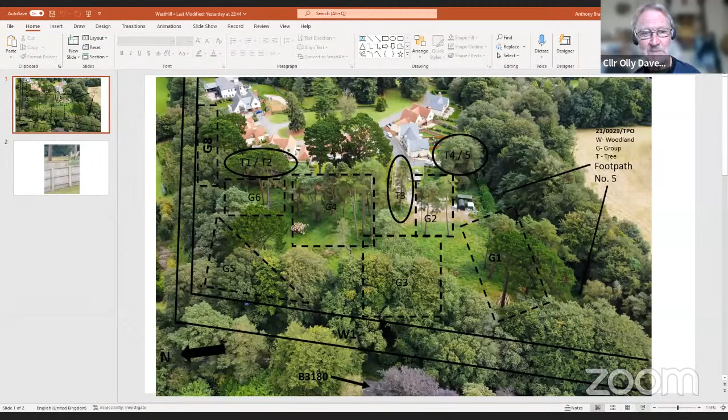Okay, and looks as though we've moved on to Mr. Bragg seamlessly. Okay, thanks, Chair and Committee. I'm negative to any development in the area described as W1 in West Hill, and I'm going to talk off the attached PowerPoint, which you've got in front of you. You can see the north orientation here, and here's the B3180 road running north-south next to it.

I have to say the icons relate to a TPO, which roughly approximates to W1. Basically last year, when the bulldozers moved in, without the early intervention of Councillors Jess Bailey, Della Cannings and the local residents, this area by now could have been denuded. The area not only offers a pleasant view from the B3180, but it's an effective noise barrier as well.

The adjoining footpath, number 5, is used regularly by local residents for their daily exercise. This area and its accompanying trees not only have a special relationship with the local landscape, but contribute to the character and appearance of West Hill. W1 is home to many species of wildlife. Hearing owls and sightings of buzzards and bats is common. Mr. Robin Offer, your tree officer, noted the presence of fallow deer when he visited on a site visit. So any development here is going to cut into this very pleasant amenity, which all of us enjoy.

I want to mention a couple of items not included on the site assessment. Number 1, there's an attenuation tank which sits astride the High Point Ordnance Survey contour line. We've had some flooding in neighbouring gardens recently, so any increased flood water could be a consequence of disturbing this attenuation tank.

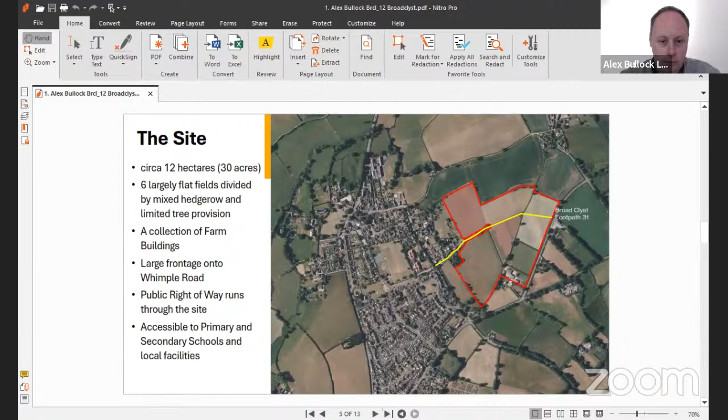As part of our early analysis, we look at the form of the settlement together with its facilities, as well as site constraints and opportunities. The site is subject to only limited constraints, including a small area of flood zone 2 adjacent to the New Inn, boundary hedgerows, and a small number of neighbours, including listed properties on the eastern boundary.

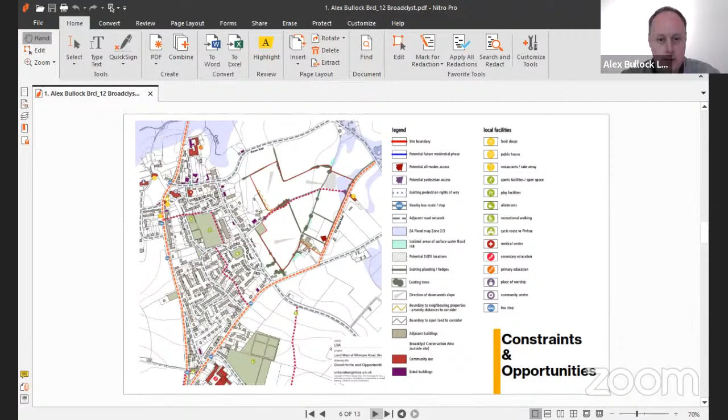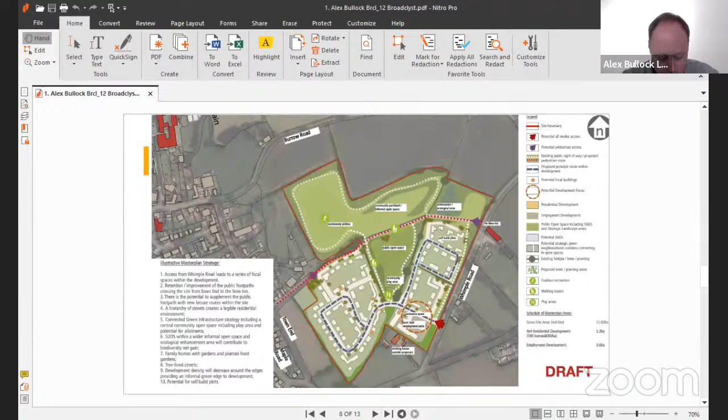This slide shows the illustrative master plan. This is our current thinking, which shows indicatively 160 dwellings, consistent with the draft wording, and a small area of employment land adjacent to the existing agricultural buildings in the bottom right-hand corner.

We propose an element of self-build plots adjacent to the New Inn, alongside the potential for community sports pitches, and significant areas of public open space, including community parkland.

We propose access will be taken from Whimple Road, and the existing public right-of-way will be retained along with the majority of existing hedgerows. As a result of this sensitive approach, together with the public open space provision, we expect to achieve a biodiversity net gain figure well in excess of national requirements.

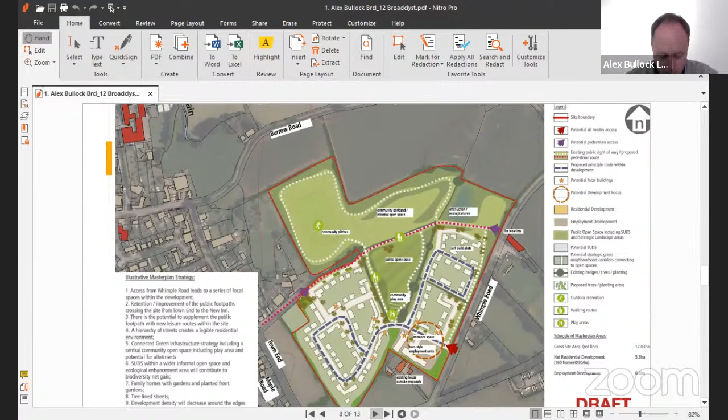We are continuing to develop our technical evidence base, which includes ecological surveys already underway with no significant issues identified. Alongside ecology work, we're looking in further detail at the access arrangements, and further technical work in respect of drainage, landscape, heritage and noise are also planned.

This site is ideally located relative to the range of key services and facilities. This includes 2 schools, both primary and secondary, a convenience store, and a GP surgery and pharmacy. All of these facilities are within acceptable walking distances, broadly a 5 to 10 minute walk.

There are further facilities within accessible distances from the site. In addition, the village is served by a public transport service that runs broadly every 20 minutes through to Exeter.

The proposals would deliver, importantly, new market and affordable housing in a highly accessible and sustainable location, where occupiers can meet a significant proportion of their daily needs without being dependent on a car.

Our proposals include a proportion of self-build plots, significant provision of public open space including a dedicated sports field, and links through to the existing public right-of-way network to facilitate access to key services and facilities. Finally, an intention through a landscape and ecological-led approach to deliver biodiversity net gain in excess of national requirements.

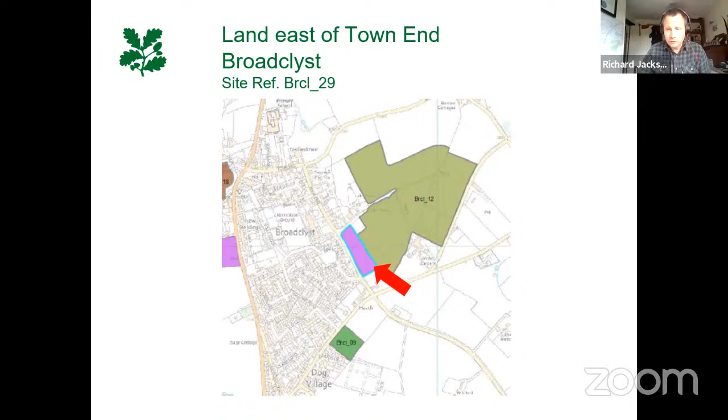The land to the east of Town End is currently let on a farm business tenancy, and it's approximately 1 hectare in size.

EDDC have conducted a site assessment, and the interim findings are in the pack that accompanied the agenda today. I'm not going to go over those points, other than to say the National Trust is in agreement with the findings, so we don't need to go over those.

The key points regarding the context of the site are that it's really well related to the built-out areas of Broadclyst, and it follows a natural continuation of the village edge. The road at Town End has a linear alignment, providing the opportunity for safe vehicular access.

In terms of the background for the proposed residential development of the site, the National Trust submitted the site into the Broadclyst neighbourhood planning call for sites back in 2017.

As part of that, the neighbourhood plan steering group commissioned an AECOM report, undertaking an independent and objective assessment of the suitability of all sites put forward, including this one. The findings can be found in that report, on the Broadclyst neighbourhood plan website.

The report was completed in 2019, and the recommendation was that this site could potentially be appropriate for taking forward through that process for up to 24 dwellings, taking into account how the development would fit with the existing built context of the village, with minor visual impacts, and that it also has very good accessibility to services.

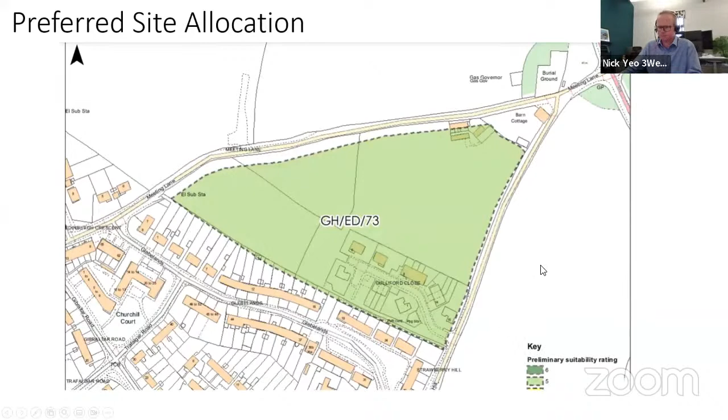We've recently gained control of this piece of land in Lympstone since it was identified as one of the preferred emerging local plan sites. The site itself was identified as the best performing potential site as part of the local plan process, the only site to achieve a rating of 5 within the settlement. It's bordered to the north and south by existing development and consented development, and on the east and west by existing roads. It represents a logical extension to the settlement edge.

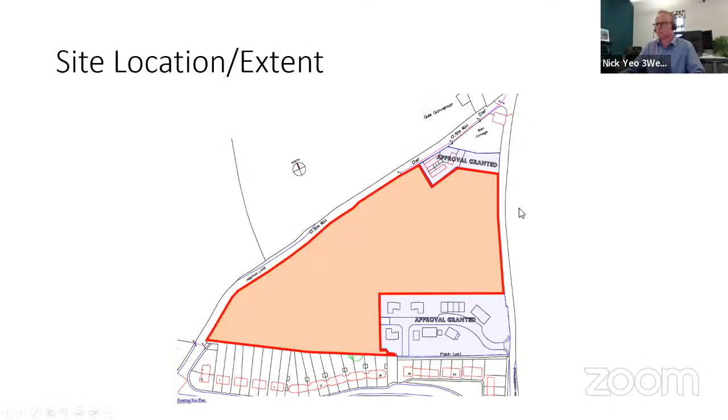So let me just bring my slides forward. The site has a relatively strong urban characteristic. I've taken some photos from different angles within the site that show it relates well to the existing settlement edge.

The development proposals, which we are at an early stage of evolving, would include the retention of the key hedgerows within the site, predominantly this one here with a number of mature trees, as well as retaining a number of the mature trees that are along the hedgerows against the roads.

The site represents a logical rounding off to the settlement edge, and is contained within the roads and existing built form of the settlement. The development proposed would respond well to site constraints and would include retaining the hedgerows and have a positive biodiversity net gain.

We would look to bring forward a scheme that reflects the draft allocation numbers. We've got ongoing pre-application discussions with highways relating to the appropriate points of access into the site and to secure appropriate pedestrian linkages. There's been pre-app discussions with planning officers relating to proposals for the site.

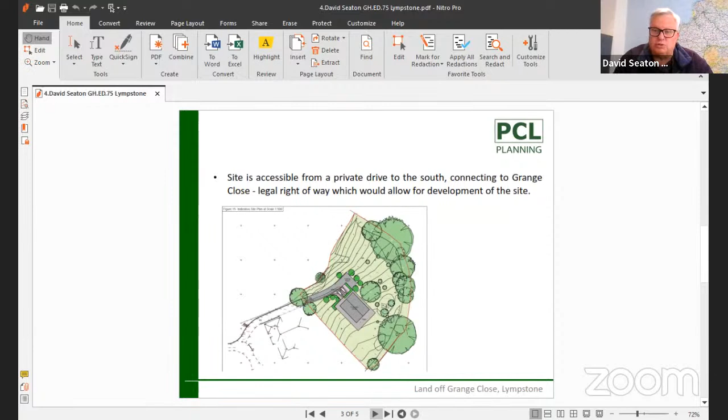Thank you very much. How many houses does that actually represent? One. It says six. Just one. Well, it looks like one on the plan. Yes. Okay, right.

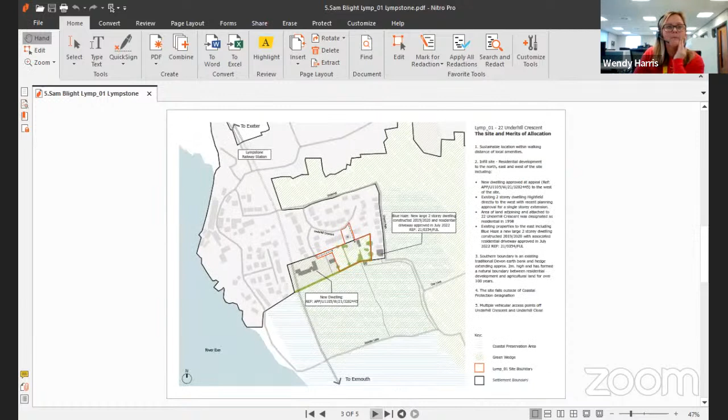I'm not going to go into the detailed planning policy or context because you're well informed of that, but I wanted to set out the merits of allocation of this site. As you can see outlined in red, the site is a fairly level field to the rear of 22 Underhill Crescent, inclusive of the house itself. It has 2 vehicular accesses into the site - both are suitable for private drives in terms of their current widths, but could be upgraded to adoptable standards. It's a very sustainable location - walking distance to amenities, accessible to the railway line and cycle footpath along the estuary. Looking at the surrounding context, it has existing residential development and approved development for housing to the north, east, and west of the site, really framing this as an infill site. The southern boundary is robust - an existing Devon hedge bank. It's a very sensible infill of that edge of the Lympstone settlement. It is within the Green Wedge, but outside the coastal protection designation area.

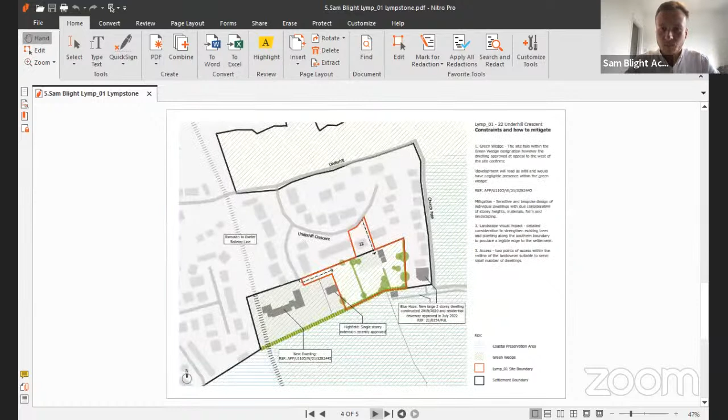If you move on to the next slide, we can see how we might address some of those constraints. It's worth saying from the beginning that looking at the site initially, doing our analysis and due diligence, there are fairly little constraints on this site, and those that do exist can be managed by sensitive design. From the first instance we agree with the principles outlined by East Devon in terms of suitability of allocation for up to 5 dwellings on this site. As I say, it's in the Green Wedge, but the recent approved dwelling to the west identified that any infill in this area would have negligible impact on that Green Wedge. It's unusually unoverlooked and very private within the field itself, and with some sensitive bespoke design, which someone like us as Acorn could quite easily manage through considered design. As mentioned, there are 2 access points, and they could be adapted to suit the amount of dwellings that would come out of the detailed design work - as I say, up to 5.

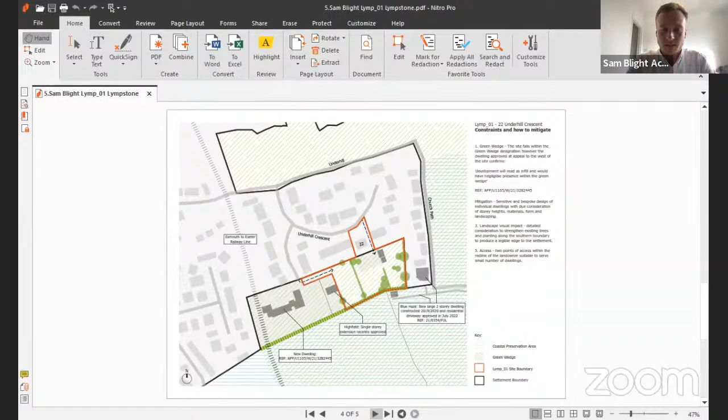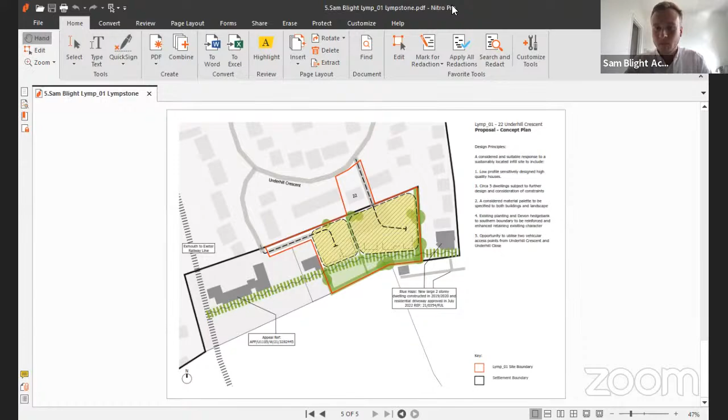In conclusion, it seems from a developer's perspective, from looking at the context, it's a very suitable site for residential development, and it should be fairly straightforward to deliver, subject to the right design response, which we feel like we can deliver. Thank you - that was all I was going to say, and obviously welcome any questions.

Thank you, Sam. Thank you. I don't think we have any hands up to ask any questions. It's quite close to the railway line isn't it, but I suppose it's far enough away for that not to be an issue for you. I think there's another property in between isn't there?

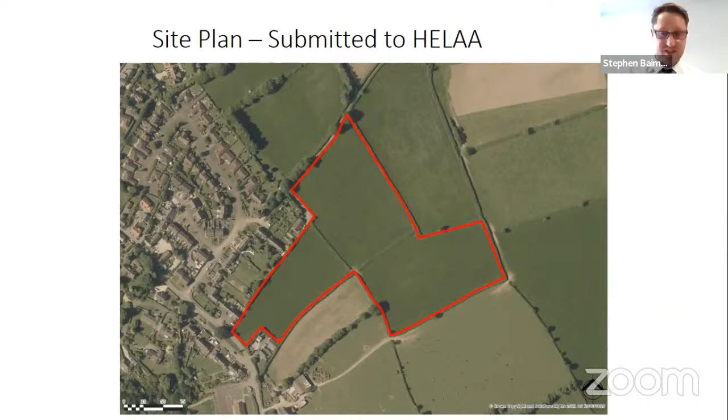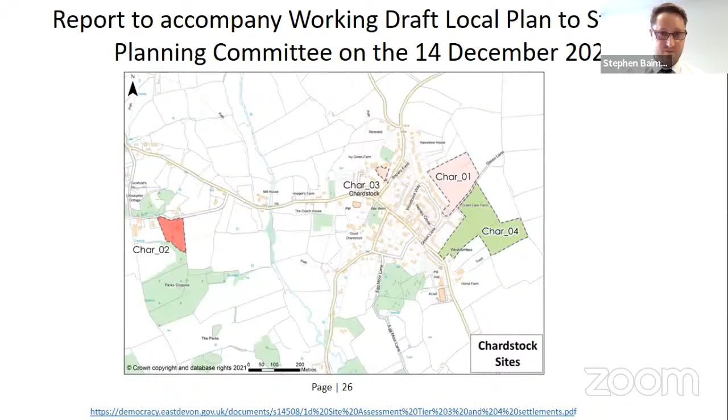I don't know whether you can make out the box there, whether you've got the same faces I have on the right hand side of the screen, but this is the comments provided by officers. The site was given a housing capacity of 30 dwellings, rounded down from the initial number we suggested, which was 62. The allocation suitability was 5 out of 6, and thank you very much for making it your preferred option to allocate.

The site is flat, it is well located to the village edge, and quite importantly it's not within the Area of Outstanding Natural Beauty, which is quite a challenge because most of the village is.

Just a little bit about Strongbox. They've instructed Greenslade Taylor Hunt to provide this presentation, and they'll shortly be under option on the site - that's very close now. They will be carrying out further feasibility work and working with the council, we hope, if you'll allow us to promote this site to a successful allocation and determination.

Strongbox Homes are a privately owned Taunton-based house builder, building sites across the southwest. The company is firmly rooted in the West Country and develops sites across the region. They currently build 200 homes a year and focus on creating bespoke sites which reflect their local surroundings and sit in harmony with the surrounding landscape, which is a key point here.

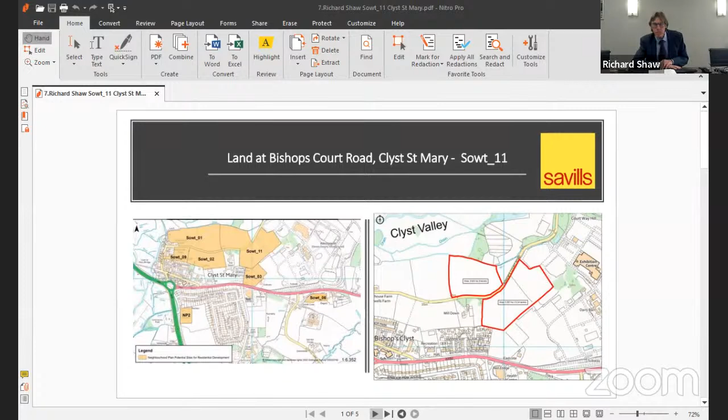The number, range and type of housing at this stage is entirely flexible and can be tailored to meet identified local needs, but could and should include affordable housing for local people, potentially specialised elderly persons housing or a care home to suit locally identified needs. Density and housing numbers can vary according to the type and range of housing.

For example, elderly or care accommodation can comprise smaller dwellings, higher density, whilst affordable housing and family housing will need decent sized gardens and be lower density.

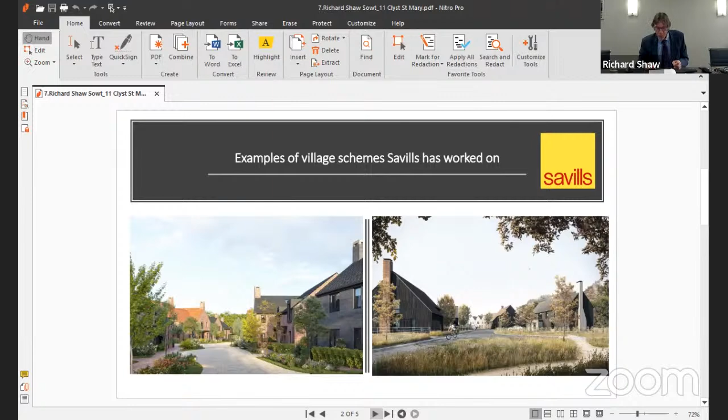The Dart family wish to see high quality, well-designed development with appropriate supporting infrastructure and facilities. They're committed to delivering that positive legacy, and a style of architecture is envisaged which draws upon the more positive and traditional local village examples.

Some examples are attached here of sensitive village contextual architecture employed elsewhere. Open space and supporting facilities can be provided as required.

As you picked out in one of the other slides, there is a lot of land available here under the owner's control for open space and other facilities, commensurate with the number of proposed dwellings, responsive to locally identified requirements for the village.

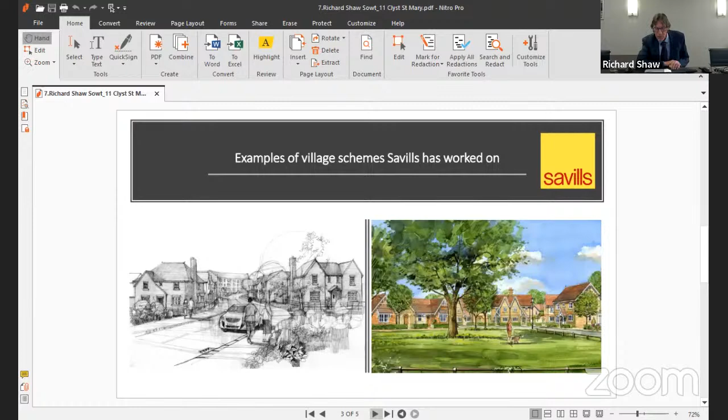Access is readily available to both development parcels. If we could switch back now to the next slide, please. Access is available from both parcels, north and south from the road.

Existing frontage services are available. There are no technical constraints to development. And so the Dart land ownership can be successfully developed either independently and phased as appropriate.

Looking more strategically, there is the potential opportunity here to combine future modest scale on Sowt_11 south of Bishop's Court Road—that's the sort of larger chunk heading off to the northeast on the plan—with land to the south shown as Sowt_03 on that plan. In that instance, new opportunities, additional opportunities are presented.

The promoters of Sowt_03 have agreed with the County Highway Authority the ability to access direct from the main road. That starts to raise the opportunity for discussion with your officers and the Highway Authority, the option of a road coming in through Sowt_03 onto Sowt_11 and linking onto Bishop's Court Road.

Chairman, that could offer quite a benefit to Clyst St Mary, because at the moment there is traffic congestion—in peak periods you get rat running going from the roundabout where the green route intersects along Frog Lane and through the village, with people heading off northwards on that lane towards the airport and related employment areas. So there are potential infrastructure and environmental benefits that could be achieved here, and we welcome further discussion with your officers on that point.

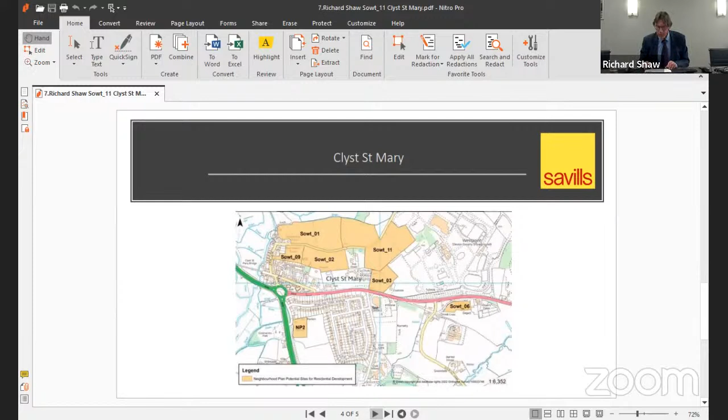As you can see, the opportunities are varied and flexible. With a collaborative approach in mind, we'll be pleased to hold further dialogue. Thank you very much for listening, Chairman. I'm happy to take any questions.

Thank you, Richard. As I thought, we have a couple of questions on this one. Were you here for the public speaking earlier? I wasn't, actually. Okay, so you won't have heard those comments. I've got Councillor Lawrence first on my screen.

Thank you, Chair. I just wanted to check something with the speaker. It says on our notes that the site has a maximum yield of 162 dwellings. He mentioned 150, but the officers are saying there's no preferred allocation and only a second best choice of 30 homes. If they only build 30 homes, is it a sustainable option as far as development is concerned?

That's a very fair point. I think the answer, as I hope I explained earlier, is that the landowner is very flexible at this stage. A development of 30 units would logically be on the area to the south of Bishop's Court Road. As I mentioned, there is ready access on the frontage, services are available, so there are no particular infrastructure requirements of any substance, really.

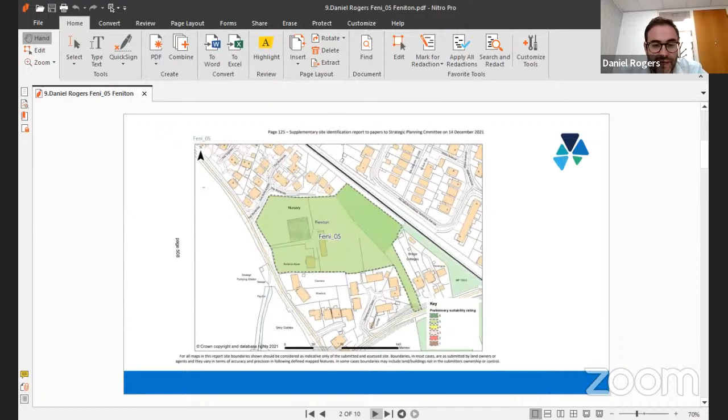The site is known locally as Burlands Mead. It comprises a residential property in its curtilage, and also a large part of the site has historically been used for horticulture as part of a nursery business that ceased some time ago. The land area in total equates to 1.4 hectares, and it is envisaged that the site could accommodate approximately 43 dwellings from initial studies undertaken. Next slide, please, Wendy. Thank you.

So yeah, you can see our slide, the site there outlined in red. Obviously identified, this was from the December committee reports and identified as a preferred allocation. It just illustrates where the site is in relation to other options for the village. We would just ask members to note the suitability of the site in terms of its location amongst existing built form. It's very well related to the settlement and with limited sensitivities, and effectively comprises infill development between the railway line to the north, the main road to the northeast, the main road to the southwest, and then you have residential development bookending the site at either end. Next slide, please, Wendy. Thank you.

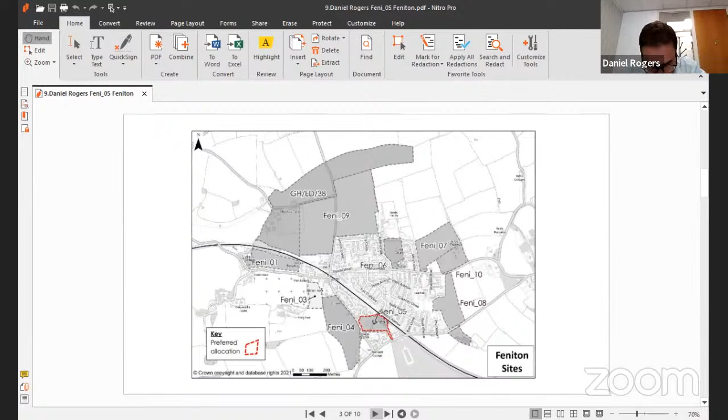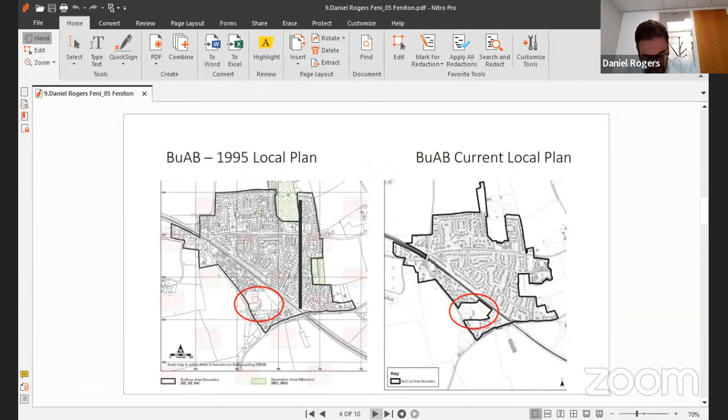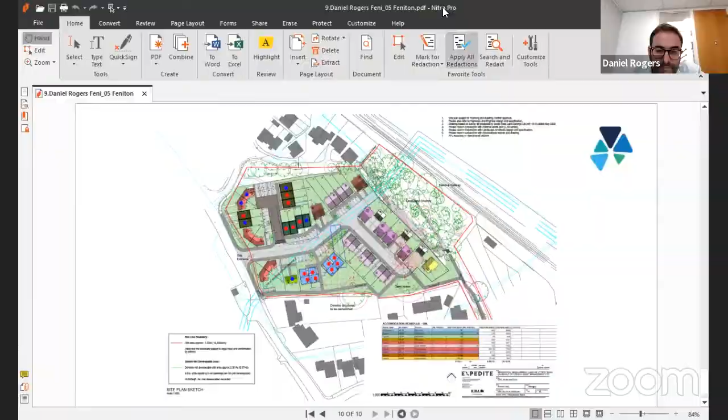Thank you, Daniel. We've got a couple of questions here.

Councillor Lawrence: This looks, on the face of it, a very good infill site, and I'm all for it. There doesn't seem to be very much about employment opportunities locally, and I wonder if the speaker could comment on that. Also, I'm mindful of the comments made by Councillor Bruce earlier about flooding in the village. Feniton floods all the time, and we do have a problem here. Does the speaker know what's going to happen about increased drainage facilities for more properties? Thank you.

Thank you, Councillor. In terms of the drainage position, I know that flood risk issues are being investigated by the engineers at the moment. We know there's an existing culvert that runs underneath the site, which is important to the village, and I know the client and their consultant team have been engaging with relevant officers at East Devon to ensure that development is laid out that keeps the line of that culvert clear, following either road alignment or open space alignment, so there's no development over it, with appropriate buffers.

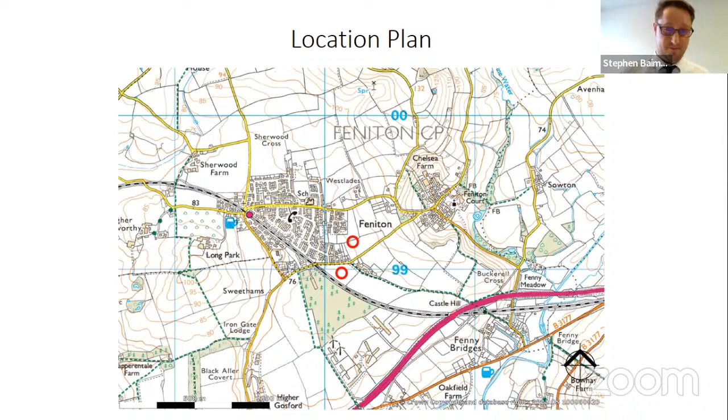Hopefully members can see this. So I'm now here presenting on behalf of my clients, Mr. and Mrs. Hard, who are the landowners for the Feni_08 site. This is a location plan showing the site, which comprises land on two sides of the road, marked with the red circles. And here is the plan that we submitted for your call for sites.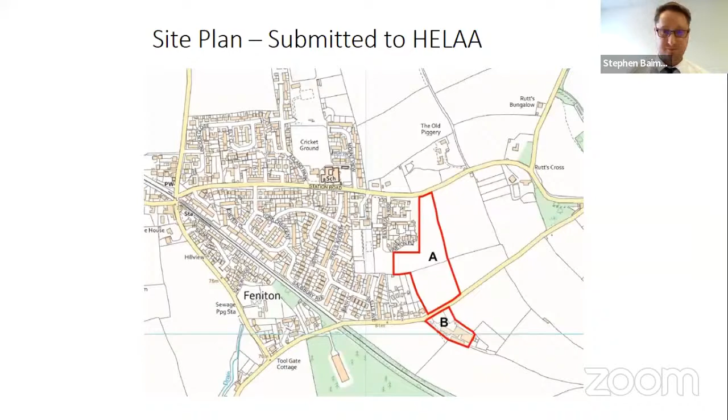So the update I have for you, members, is that the landowners have now made an additional 2.2 hectares of contiguous land available. The land is more developable now than at the point we submitted our presentation, because we now have numerous bids. At the point of writing, I believe the bids were from house builders interested in option agreements, but there is also interest in land promotion agreements as well. So a very developable site, from what we've seen in respect of the development community's interest.

This is an updated plan for members showing the available, suitable, and deliverable land. The difference is the land to the west of the brownfield site, Site B. You can see now the additional 2.2 hectares, which I believe makes the brownfield site better connected to the edge of the village.

And that picture again, with some additional information. Site A, to the north, has had no change to its extent. But it's interesting to note, members, that the client has a right to gain access to this land via the Wainhomes site. They also have the ability to connect into the utilities there, which solves potentially any concerns you may have about feasibility issues in that respect.

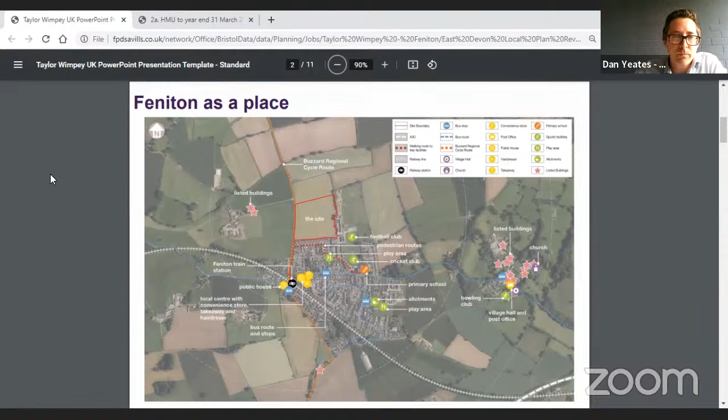We'll move on to a master plan and where we are with the master plan and the technical work with the site shortly, when I pass over to Chris and Angela. But just to point out that the work on the master plan for the site has very much been informed by a lot of the key principles that are coming through the emerging local plan, and rightly so. Key aspirations around moving towards low carbon development, aspirations for 20-minute neighbourhoods, boosting biodiversity net gain and habitat creation. And with the sites that we have in the land available, there are lots of opportunities to explore that, and really good opportunities to enhance those issues. The train station in particular is a key selling point, and does really allow us to explore growth at Feniton, and move towards more active travel and low carbon development.

In terms of the site itself, it has scored very well so far through the council site assessment work. Scores 5, which is very good, just below the top score of excellent. And as I just mentioned, apart from how well the site is connected to the services and facilities locally, I think that the opportunities for this site, particularly with the land available compared to other options in the village, it's trying to deliver a quantum of housing which brings with it opportunities around more affordable housing. So the quantum of affordable housing that you could potentially deliver on a site like this could help with local needs, but also just trying to focus development around a place such as Feniton, where there are opportunities to use low carbon travel and move away from use of the private car. And indeed, I think that the focus around active travel is aligned with the drive towards tackling the climate emergency generally.

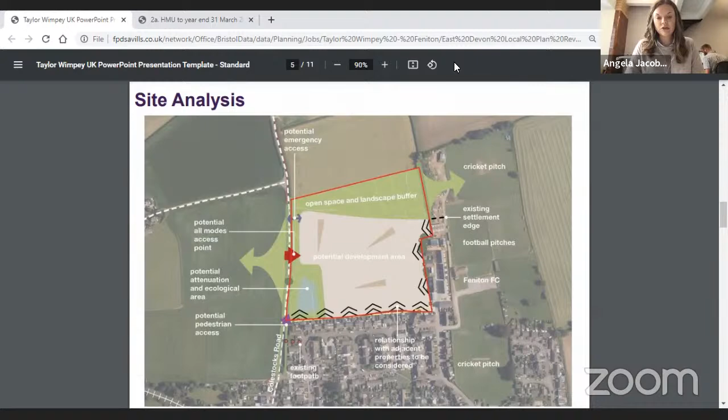Moving on to the vision for the site: our aim is to create a walkable neighbourhood close to the heart of Feniton, with an easy to navigate street layout which would encourage pedestrian movement. We want to provide good access to transport links, local facilities and services.

We're also proposing 2 new bus stops as part of the proposals, as well as the footpath link which goes towards the existing facilities. There'll be approximately 120 new homes, with 50% of those being affordable properties.

There's an opportunity to deliver community and recreational facilities, and we'd like to discuss what those might be further with the council. We'd also be providing new walking routes in the extensive area of public open space, which would be a benefit for existing residents and the new homeowners.

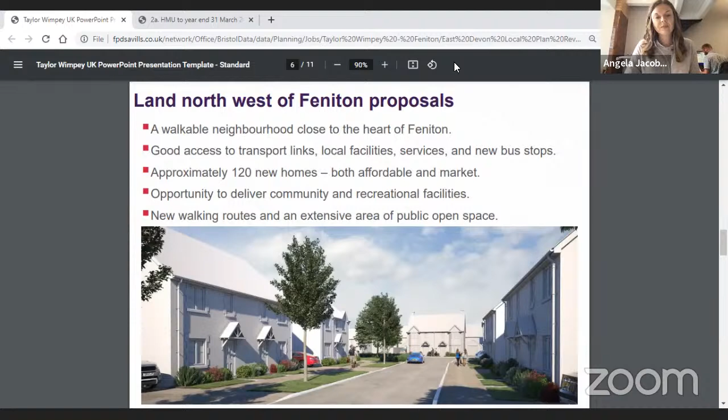Looking at our master plan, the entrance from Colestocks Road leads you into a linear key space, which would have a Green Avenue feel to it, replicating the arrangement along Station Road within Feniton.

There's a main access loop which then branches into residential streets and private drives, with homes overlooking the public open spaces along these. There are key buildings proposed in prominent locations, which would aid legibility when moving throughout the scheme.

We're also proposing to back onto the existing properties with additional screening between the proposed homes and existing properties. As mentioned, there's a main open space at the entrance of the site, which provides a setting for the drainage area and also the footpath link.

The main area of open space is to the north of the site, and that could include allotments, a community play area, walking routes, natural planting and picnic benches. But the use of this area will really depend on what local aspirations are, and we look forward to discussing that further if the site progresses.

Just hand over to Chris for a bit further technical information.

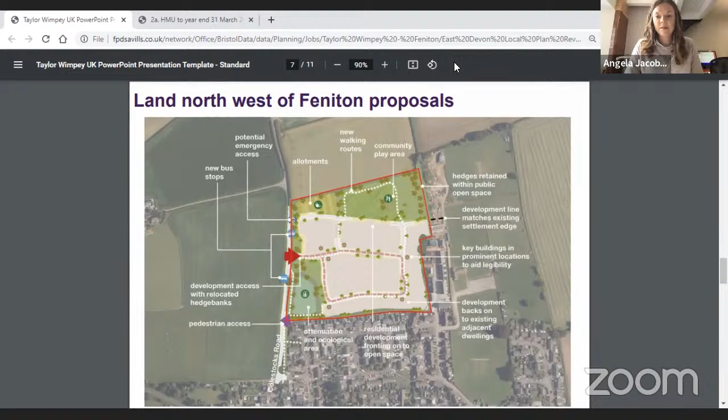Thank you, Angela. So we want to describe 2 key technical considerations, being landscape and ecology, and we see these as fundamental to a successful scheme.

The site is relatively contained visually by the topography and existing vegetation, but the creation of a new landscape buffer on the north and western edges would create a soft settlement edge and allow for screening from structural planting. There are no landscape designations covering the site or surrounding area, with the Blackdown Hills AONB over 3 kilometres away.

In terms of ecology, there is an opportunity to provide an on-site biodiversity net gain, along with ecological enhancements for a range of species, tree and hedge planting. We can also interlink that with biodiversity education incorporated into the play area space and the play trail for infants, who will obviously be supervised by their adults.

The highways and access are covered on the next slide. Angela's already alluded to the access from Colestocks Road.

This will be a right-hand turn lane, and there will be new footways and bus stops, which would allow the 694 bus route to link the site to the village and train station. The new footways will allow safe pedestrian access from the site to the existing village, and will also allow for hedge retention and new hedgerow to make sure the rural character of that lane is retained.

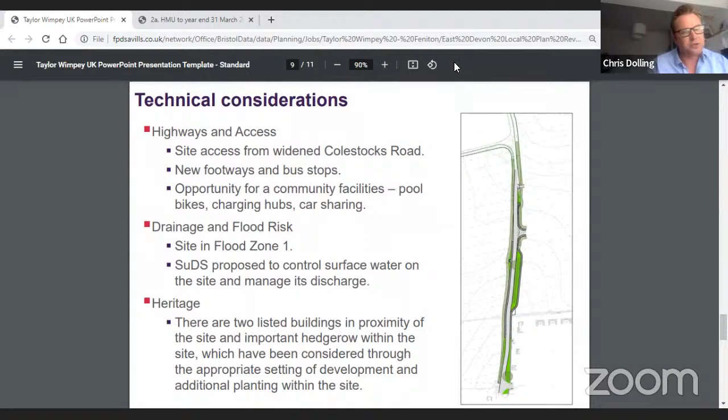In terms of Taylor Wimpey and our sustainability credentials and objectives, we've released our own environmental statement, which is shared within our website for everybody to see, and we believe this to be industry leading. The main point of this environmental statement, the headline, is that Taylor Wimpey's homes will be carbon zero ready from 2025, and that's a really positive thing.

Separate to this, we're now proposing car charging points for every dwelling on every future new scheme, which goes without saying, along with bike stands and home working. The future is being fully embraced by our revised house types, because we are now factoring in working from home ability within those house types.

Those house types also allow for and include wastewater and flue gas heat recovery. We're allowing for PV, and also the future seems to be that we're moving towards air source heat pumps. But all of this technical criteria will be assessed, and it will evolve over time. We are putting significant R&D, research and development investment into sustainable technologies.

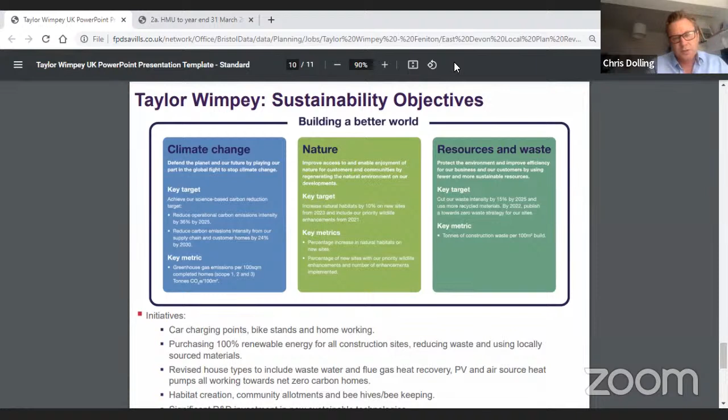The final point is that habitat creation is something we are very much happy to do on all of our sites going forward, whether through community allotments, beehives, wetlands, or any type of grassland and ecologically rich offers within our schemes. We want to achieve a biodiversity net gain of 10% on all of our sites moving forward. So just to invite any questions that anybody may have for Dan, Angela and I.

If you can stop sharing, I think, yeah. Oh, and here we go. Councillor Richard Lawrence, get in there.

Thank you, Chair. Yes, I just wanted to check on something. It was glossed over a little bit, but I think I heard the speaker say they were looking at 50% affordable. It might have been 15, but I think they said 50%. And I was quite interested to hear about the air source heat pumps as well. So would they confirm that the air source heat pumps could be powered by PV cells on the roof rather than taking electricity from the grid?

Thank you very much. I'll take the first one, and I may just ask Chris to come in on the heat pumps question. In terms of affordable, apologies, I did mention affordable but without being specific on percentages or numbers. I think we're very much promoting the sites as including a policy compliant level of affordable housing. So Angela mentioned 120 dwellings. The policy compliant level, 50%, or whatever ends up coming through the local plan, would be introduced as part of that site. So I think the point I was making was that in exploring a slightly higher quantum of development, what comes with that is the ability to deliver a higher overall amount of affordable housing compared to other options. So just to clarify, the policy compliant amount of affordable.

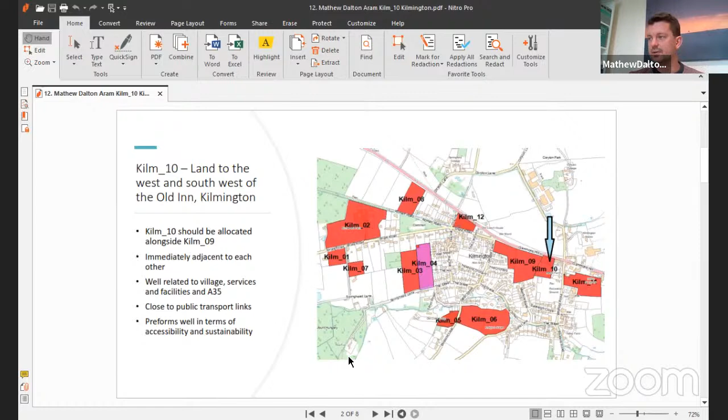It is important to note, however, that the inspector considered that the development of the site would not have harmed the landscape setting of the AONB, contrary to the site assessment provided within the committee report. The inspector's report highlighted that while the site is within, but on the edge of the AONB, it is not so topographically prominent that development upon it would undermine or compromise the landscape or scenic beauty of the AONB. Further, the inspector considered that the visual impact of the development would have been generally confined to its immediate surroundings.

The allocation of the site within the local plan would resolve the first conflict, as its inclusion would mean there would be no in principle objection to the development. Next slide please.

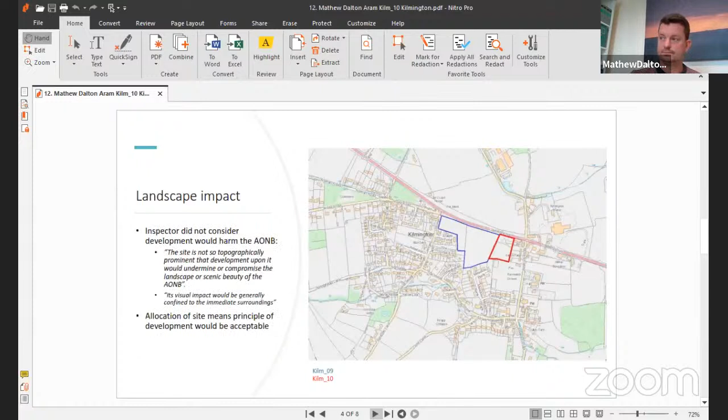Turning to the potential harm to the setting of the listed building, the application was submitted in outline with all matters reserved, meaning that the detail of the proposal was to be agreed at reserved matters stage. However, an illustrative layout was submitted with the application, showing a horizontal alignment of 5 dwellings across the site from east to west, as shown in the image on the screen.

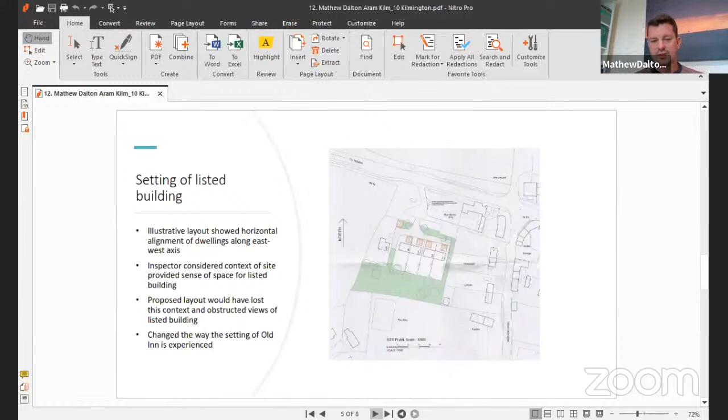The inspector dismissed the appeal as she considered that, based on the information submitted in support of the proposal, it was not possible to determine the impact of the development on the adjacent listed building. The inspector considered that the existing context of the site provided a sense of space for the listed building that would have been lost as a result of the development, and would have obstructed views of the listed building towards and from the recreation ground to the south of the site, consequently changing the way in which the Old Inn is experienced. Next slide please.

However, the council's conservation officer, in her consultation response to the planning application, suggested that to minimise harm to the listed building, the dwelling should be reorientated to show a north-south axis, which is shown somewhat crudely on the image on the screen now. The conservation officer considered that this revised approach would have reduced the mass of the built form on the setting of the listed building, allowed for wider views of the landscape beyond the site to be experienced as part of that wider setting when viewed from the car park and the A35, and in turn would better respect the pattern and urban grain of the area.

So in summary, the conservation officer considered that the reorientation of the dwellings along the north-south axis rather than east-west would result in a more comfortable layout when balanced against the immediate and wider setting of the listed building.

There are also considered to be additional benefits to the reorientation of the dwellings, in addition to a greater separation from the listed building, as it could also provide a potential linkage to or extension of the recreation area to the south of the site. It could also provide a footpath link through the site to that recreation ground, which could also connect with the George Lane allocation to the west.

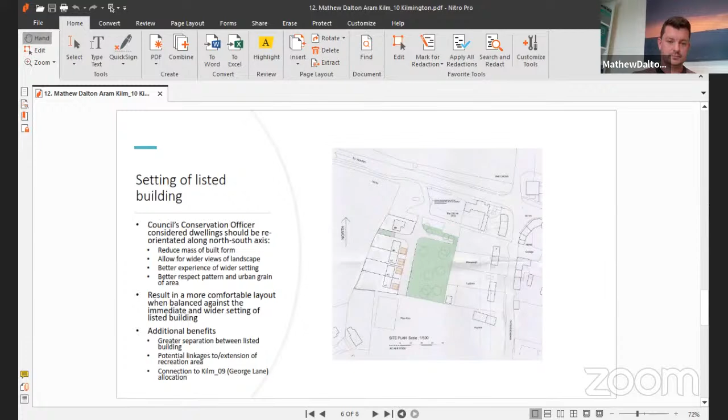Turning to matters of access and highway safety, an access statement was prepared by a transport consultant and submitted in support of the 2017 planning application. That statement concluded that the proposal represented a sustainable form of development in transport terms. The location of the site provided sustainable transport options other than by use of private vehicles to access the services, facilities and amenity within the area.

The projected traffic generation indicated that the traffic impact of the development would have been minimal, predicted to be an average of just one vehicle movement every 15 minutes during the AM, PM peak hours. The approach road network was considered acceptable to accommodate the low level of traffic that would have been generated by the proposed development, and the site access arrangements were discussed and agreed with National Highways. On-site provision would also have accorded with the local plan's requirements.

Finally, as the tracking layout on that slide shows, the proposed dwellings would have been accessible for delivery, service and emergency vehicles. National Highways raised no objection to the 2017 application and considered that the proposed small residential development would have been unlikely to have a severe impact on the safe and efficient operation of the A35 trunk road. Next slide, please.

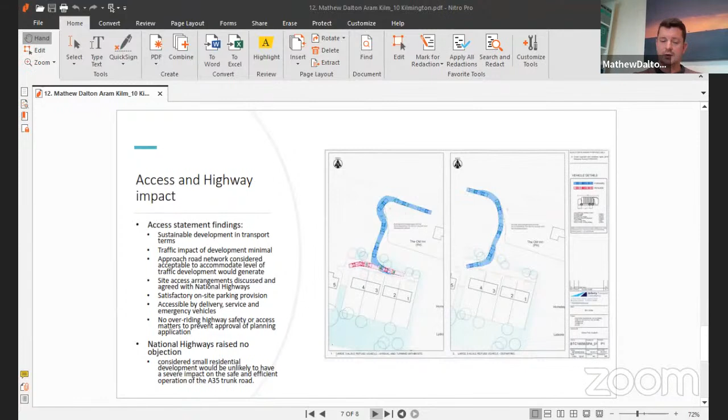So in summary, it's considered that it would be beneficial to bring forward the site Kilm_10 at the same time as the adjacent site Kilm_09. The two sites together would effectively infill a section of land between existing built form to the west, south and east, which in turn would link the built-up area boundaries in the east to that in the west and would be contained by the A35 to the north. Therefore, the allocation of the land would be a limited expansion of the settlement, but would not encroach into the surrounding countryside and would be of an appropriate scale and in an accessible and sustainable location.

Members are therefore respectfully requested to consider the inclusion of this land, the land adjacent the Old Inn, as a preferred allocation within the draft local plan. Thank you.

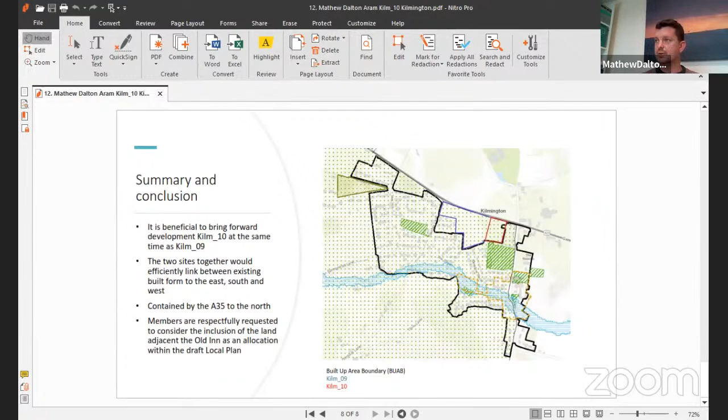Thank you, Mr. Dalton-Aram. Don't see any hands up with questions. Ed, do you want to come back on this one at all to perhaps discuss how we're going to proceed this afternoon in considering sites that are currently ruled out and whether we want to at least put them forward for consultation?

Thank you, Chair. Well, this site isn't ruled out. It is currently a second best choice site, and I think the presentation's highlighted the issues with this site. From our assessment work, we feel further work is needed to demonstrate that it would be suitable as an allocation, and hence that's why we've identified it as a second best choice. Obviously Mr. Dalton may well have done some of that work, and maybe that's a conversation we would need to have with him moving forward if the site gains support. But I think I stand by the second best choice identification at this stage. That further work would need to happen for it to move up in our assessment.

Thank you, Chair. Okay, thank you, Ed. That's good. At least it will go out to consultation if it's a second best site.

Okay, that moves us on then to our next presentation, which I think is Sidbury. And we have Dan Yeates again from Savills, and this is land between Furzehill and Hillside in Sidbury. Over to you, Dan. Thank you, I will just share the presentation again. Let me just do that.

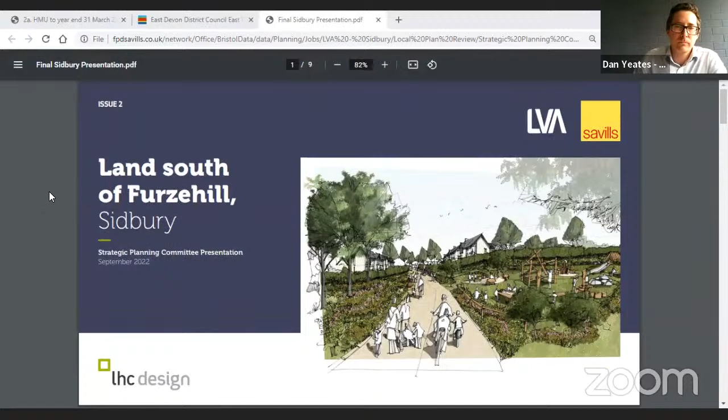Some of you may recall that we presented on this site at the beginning of the year, so some of the context information around the site may be familiar, but just to recap for those that weren't part of that session, the red line for the site shows the land in between the main part of the village and south of Furzehill, but moving down to Hillside, which forms the lower part of the village. So it's a proportion of land in between the two parts of the village, and this is just to show where the site is, the connectivity of the site to the village core.

The site is being promoted by Land Value Alliances, who are land promoters, but it's also on behalf of Sidbury Manor Estate, who control a lot of the land around Sidbury. So it's very much a joint promotion. The estate are very much involved.

It's a site that we have been promoting for some time through previous versions of the local plan, site allocation, villages plan, etc. But LVA, a Southwest-based land promotion company with an awful lot of experience in promoting sites like these, we see this as an opportunity to deliver a scheme which we think the community can hopefully really get on board with, to try and bring a site in as a preferred allocation for Sidbury, which isn't currently something that is in the current version of the plan.

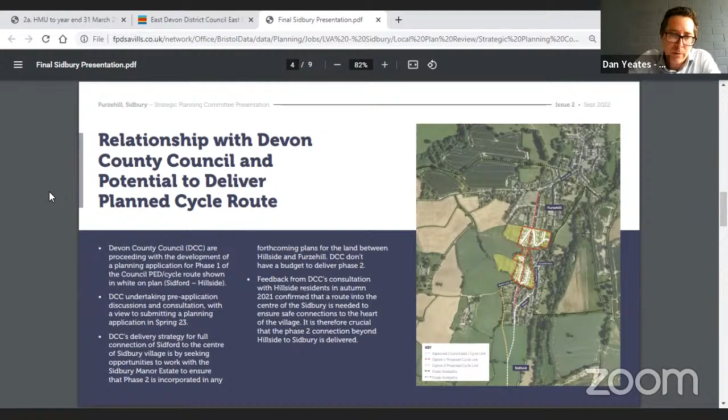So working with the County Council, the master plan is very much driven by incorporating that pedestrian cycle link as a fundamental driver for the site.

Why Sidbury? At the moment, I've just mentioned that the wider site is labelled as a second best option. The northern field, SID 33, was previously highlighted as a potential preferred allocation, and now isn't. I think Sidbury, in our view, should have a site allocated for development to deliver small-scale housing to meet local need, and I think what we're trying to do here is explore an opportunity on a site that is in reality the only site that could do that in the short term.

And to deliver a mix of housing, importantly deliver affordable housing as well locally, but responding to constraints which we'll work through in a second.

In terms of the site assessment work, so the two sites I've mentioned, just to clarify, SID 33 top right is the site that had been looked at and has been assessed, and more recently SID 34, the larger site that has been assessed now through the call for sites process. I think the key here is, whilst we presented on SID 33 effectively at the beginning of the year, we see the opportunities and the benefits around promoting a larger land area.

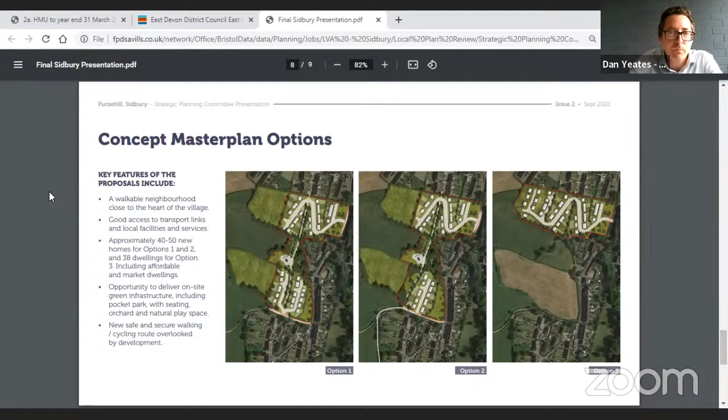So just to move to questions, really - that's the end of the presentation, but happy to take any questions.

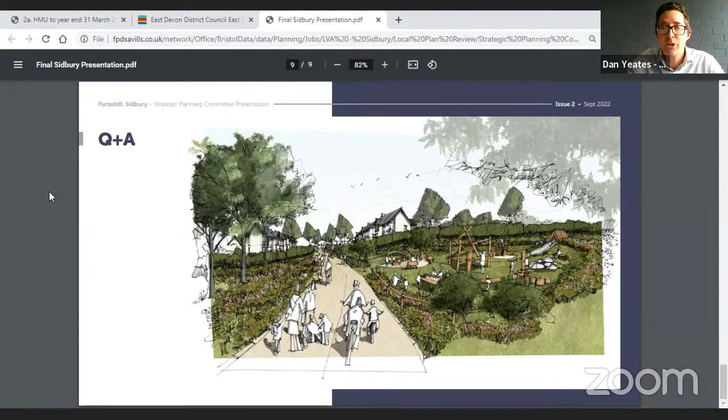Yep, we have a few questioners. Councillor Loudon, welcome. Do you have any declarations of interest, Councillor Loudon? Because we haven't asked you yet. None, to my knowledge, Chair. Thank you. Great, thank you.

I have a couple of questions, if I may. I'm the ward councillor that this site sits within, and I've now had the opportunity to hear Mr. Yeates twice, because this is virtually the same presentation we had back in January. So that's useful, and I'm going to partly rely upon what he said back in January for what is now Sidmouth 33 and was Sidmouth 10, to supplement what he said today.

So first of all, it's about connectivity. Do you know what the time of the last bus in and out of the village is now?

So I was just checking I wasn't on mute.

I don't have that information to hand, but are you talking about the service that takes you down to Sidbury, from Sidbury to Sidmouth or Honiton? It has changed since you presented in January - the last bus is now 7 o'clock at night.

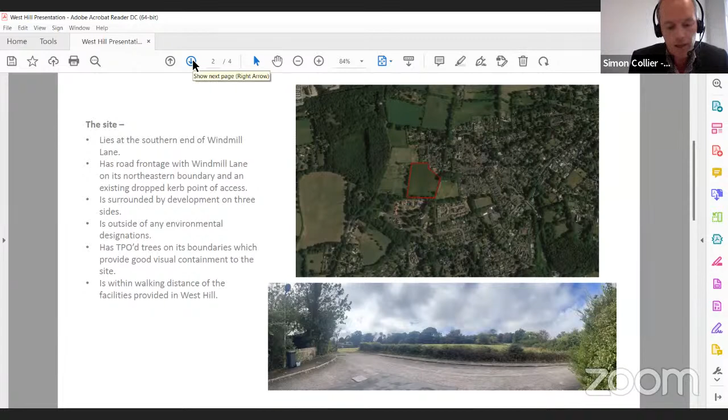The site is surrounded by development on 3 sides, to the north, east and the south. It's outside of any environmental designations. It does have trees covered by tree preservation orders on its boundaries, but these serve to provide good visual containment to the site - you can't see it from the surrounding area unless you're standing in Windmill Lane itself. And it's within walking distance of the facilities provided in West Hill.

So an allocation could deliver a development of between 30 and 40 dwellings, including affordable housing and open space. Vehicular access can be gained from the existing dropped kerb point of access on Windmill Lane. Ecology surveys are being undertaken, and other initial technical reports have already been prepared and raise no constraints to development, consistent with the council's own assessment as a preferred allocation. The site is within easy walking distance through Moorlands and Beech Park of the village shop, school and facilities, and it's also close to the bus stops.

The aerial photograph shown on the screen shows the most direct walking route currently available from the site to the village facilities, the school and the shop, which is much shorter than the route identified in the council's assessment. So whereas the council's assessment identifies that the site is within walking distance of those facilities, there is actually a much shorter route, making it even closer on foot, shown on the yellow line there, which takes you through footpaths that perhaps weren't known to the officers who undertook the assessment.

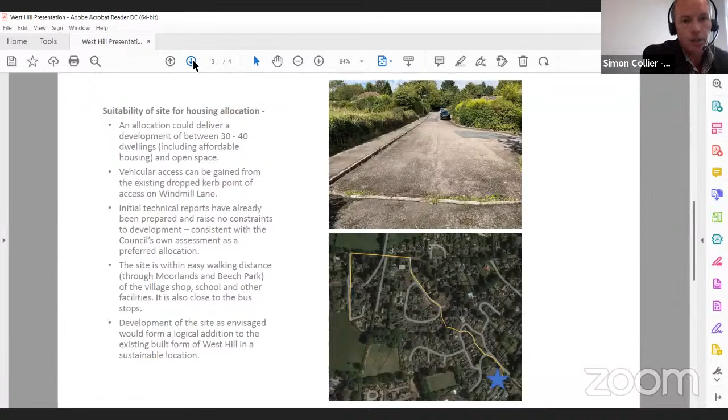The site was initially put forward through the call for sites by the landowner, but Strongvox Homes, a local house builder, now have an option agreement on the site and are in the early stages of reviewing the initial layout ideas which had already been prepared. So that plan in front of you is an initial layout idea which Strongvox Homes will be progressing, making sure that it addresses appropriately the factors raised by the technical work being undertaken. It's really just an indicative plan at this stage, nothing more.

Members may be aware that Strongbox developed the adjoining site to the south, which has now all been completed, and members may be familiar with the attractive affordable homes provided on that site, which are a feature on the front cover of the council's affordable housing SPD. So just to conclude, given the absence of constraints and that the site is within the control of a house builder, the site is not only suitable, but also very deliverable and capable of meeting the housing needs of West Hill over the new plan period. Thank you.

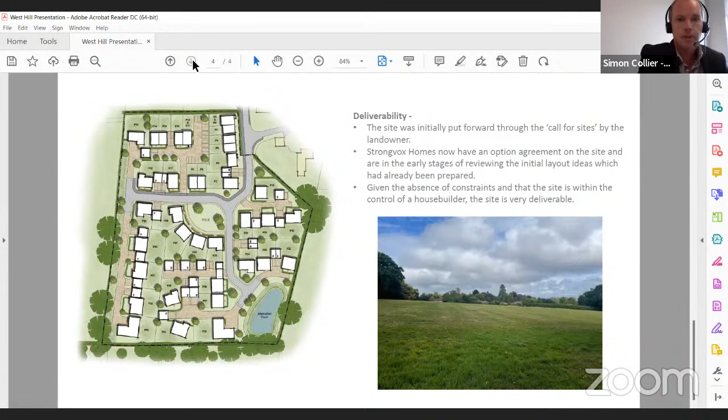Thank you, Councillor Davey, and thank you for the presentation. Where do you think the children from this site are going to go to school, please?

We, as I said, Strongvox Homes have only recently taken out an option on the site. We're talking about allocations at this stage, so I would assume that as part of the work that has informed the council's site assessment, consideration of school places will have been taken into account, and like a lot of villages in East Devon and throughout Devon, there may be issues with school capacity. That's not something we've looked into at this stage. But if there is an issue with school capacity, and I'm guessing from the question that there may well be, then that's something we can work with the council and with Devon County Council's Education Authority to seek to overcome.

Thank you. Yeah, because the schools are full, West Hill is at capacity. I'm a Devon County councillor, and I have specifically checked today, and the primary school and the secondary school are at capacity, and they're one class per year. So it's not as simple as providing, paying per child - it's not that straightforward. So the schools are full. Also, you talk about the connectivity, but at least some of that walk is unpaved, isn't it? Could you comment on that, please?